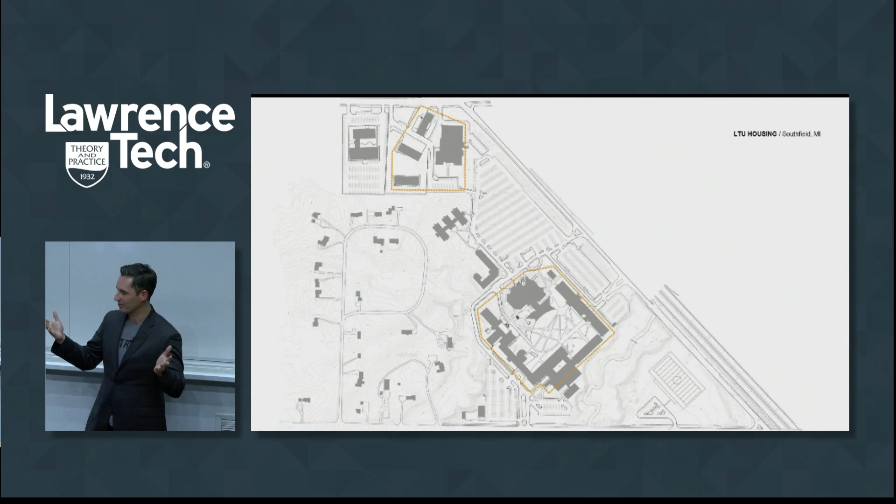And what we find is that people like you have way more opportunity to make an impact on that than, say, people like me. I'm actually that age now, so unfortunate, but it's true. I'll probably refer to a lot of things in this that I'll say, I didn't actually do this.

I don't understand how this works, but here's the interface that helped me understand it.

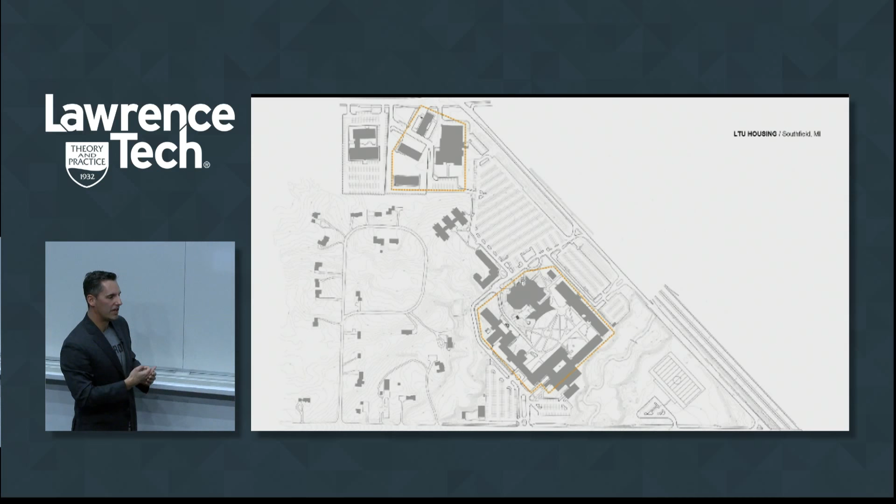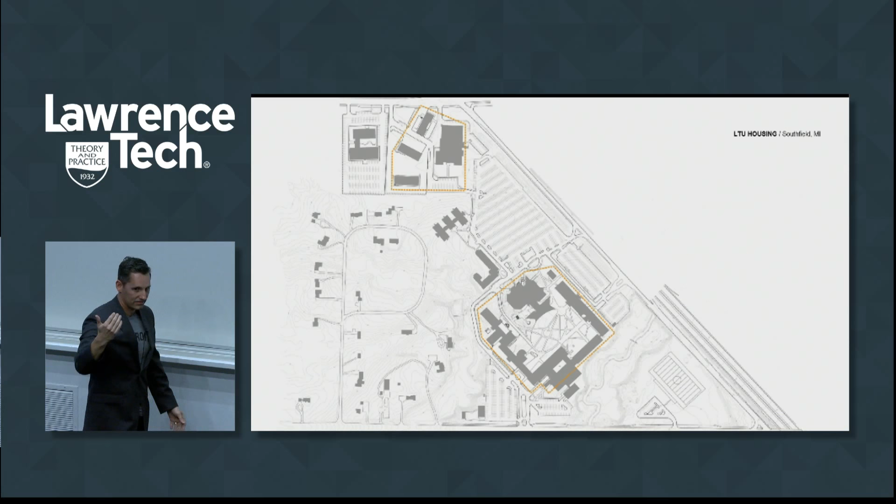So to start with, I did promise we would talk about the housing project. Just to set the context, generally speaking, when you're dealing with design and architecture, there's a three-part triangle to things: cost, time, and complexity or quality of design. Usually those things have a reciprocal relationship. If the quality of design goes up, what probably happens to cost? It goes up. And if the time needs to be compressed, what usually happens to the cost? It goes up. So usually these things have a reciprocal relationship.

Well, the ambition for this was we want to be in it in a year and a half. We need it to be really low budget, and we have a really ambitious design for this. So not exactly working with that triangle, but hey, we love a challenge, and that was a great way to operate - it was an incredible design challenge to work to.

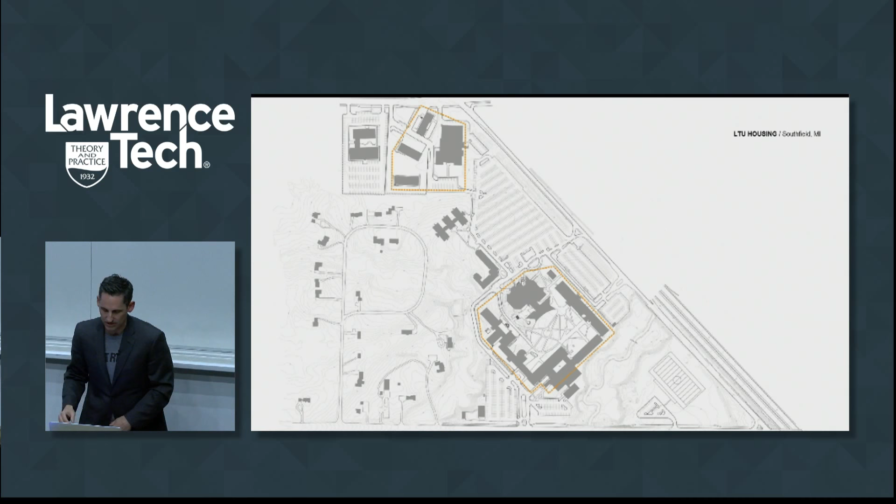So what you're going to see is the process that got us where we essentially are, and then where it sits in construction right now and why.

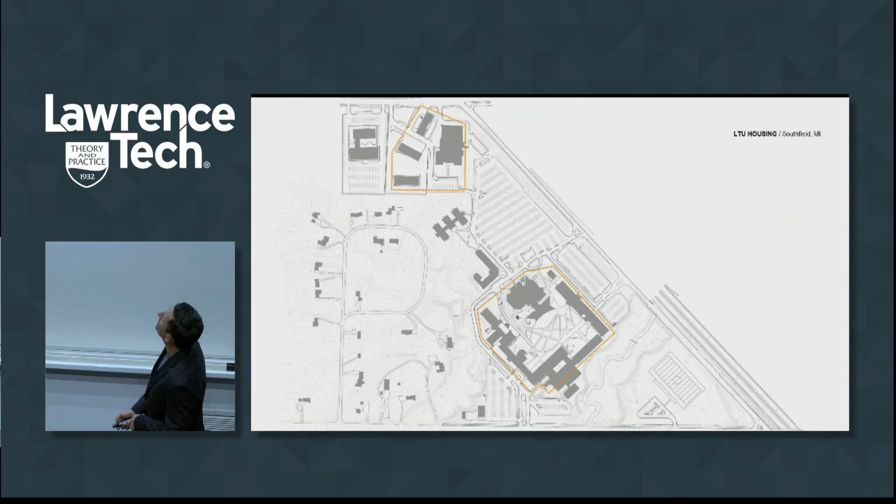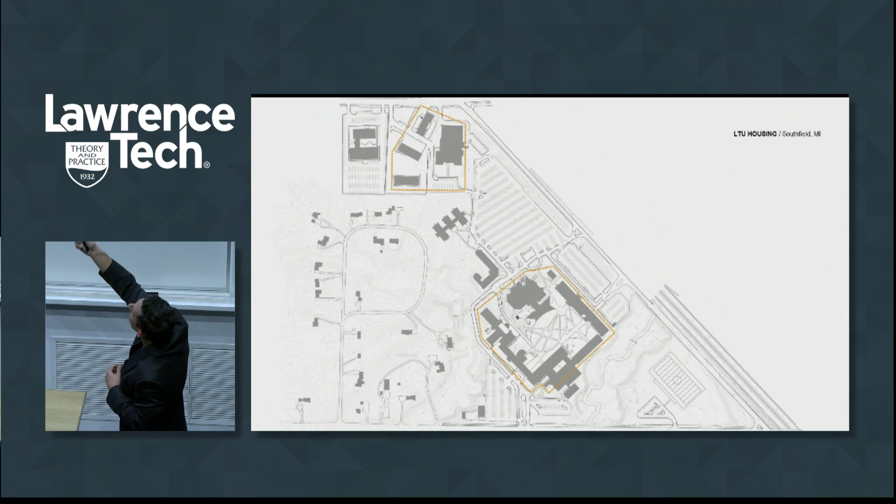To start, we looked at two components of the campus that were important to understand. One was the academic part of the campus. We call the other North Campus or ancillary structures. With each of those, in a figure ground relationship you find there's a nice space created. There's potential for it here. But there's this area in between that we were really interested in - the idea of could you create a district for housing. So it's a housing district, not necessarily just two buildings.

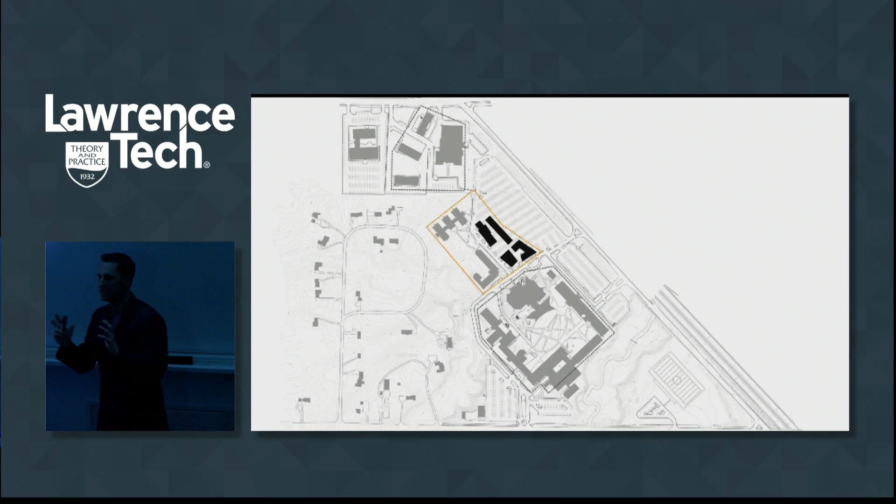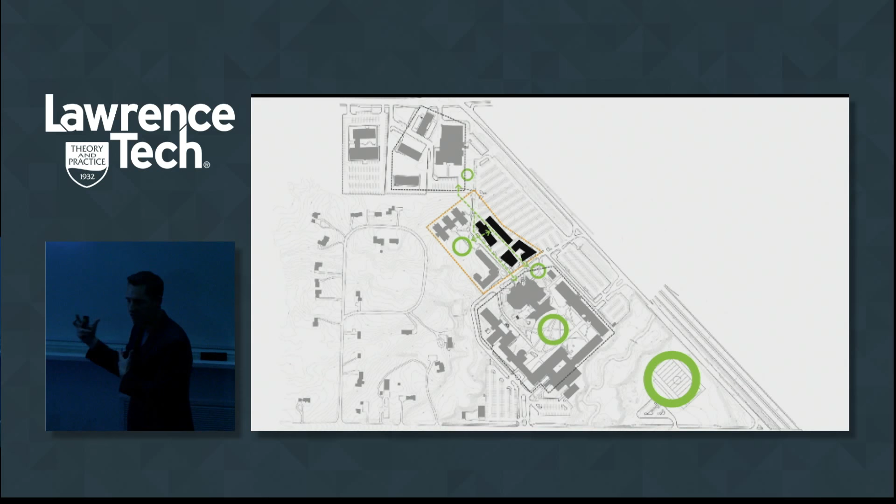So we looked early on at the idea that there could be a collection of buildings that would connect the academic campus to future development of ancillary space to the north. The thought was if we look at this linear relationship, there's strong connectivity from the ancillary part of campus to the academic part, and that could happen through the idea of a housing district - also creating space for a housing district so that by adding a third building and creating that space, there's something shared as a public, campus-accessible space within it.

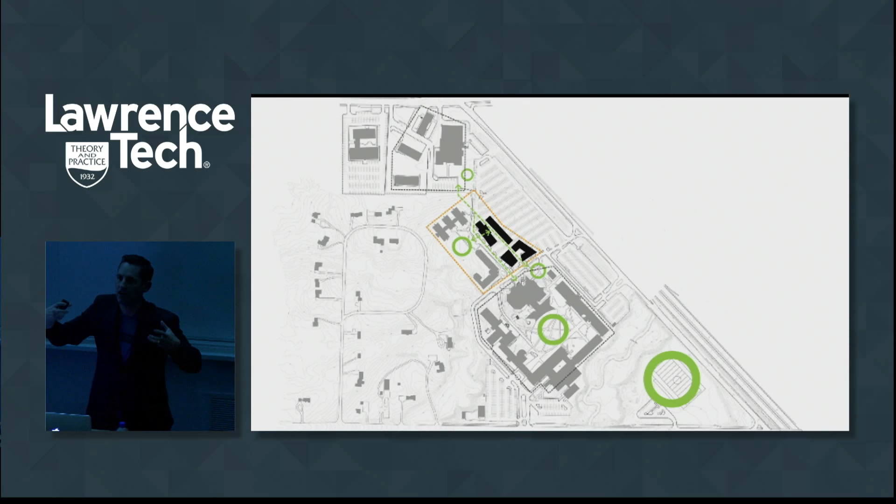So we started looking at locating the building in this area. The idea was that as we project and go vertical, it creates potential for a campus space within it. We also looked at the fact it's within the parking lot, so we elevated it, gave it a bit of a podium, so that if I'm in a residential unit, I don't want to be looking directly out at parking. Give it a little elevation so it has a sense of privacy.

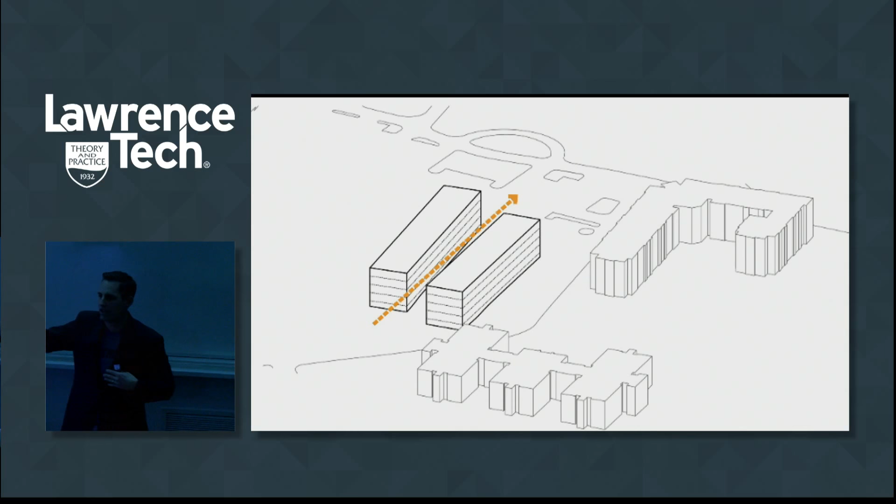And then we looked at the split. You don't want to feel as though it's broken, that you're not able to see or make the connection between the north part of campus and the academic part of campus. So this idea of a pass-through.

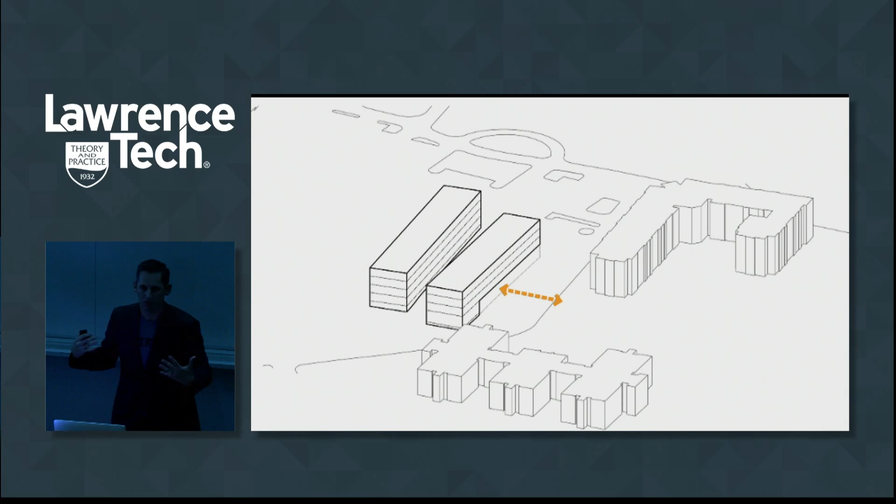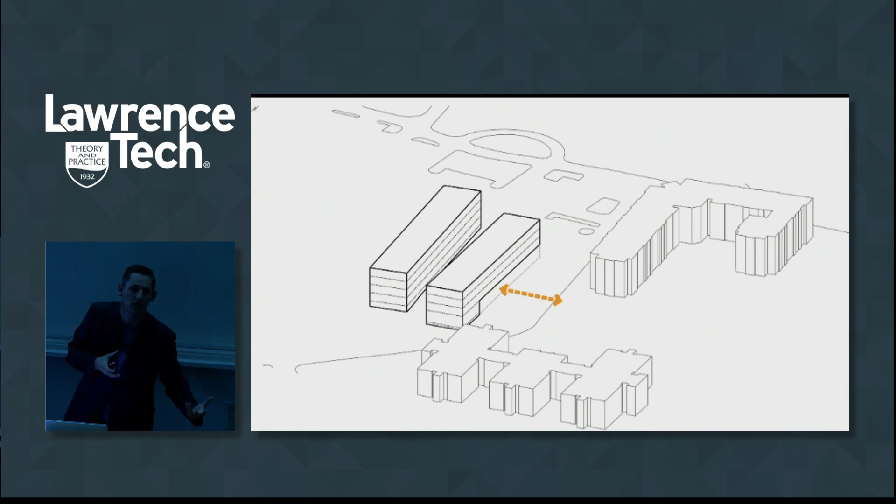The other condition that was really important is there's got to be a public component of this. In other words, if people are passing by or this is a gathering space, how do we treat the first floor so that it's not housing - it really feels like anybody can use this type of space. It's probably not a secret the football team is coming, the marching band is coming, all these kinds of things. Maybe there's not as much access to the fitness facility - what are other programs we could put into this that create a dynamic relationship, a used-by-all scenario?

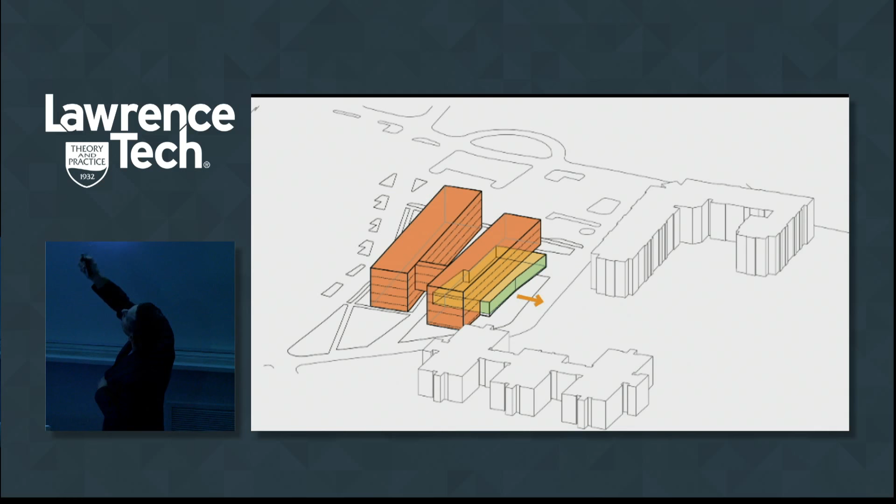That gave us this sense of taking the whole ground floor and accommodating it as public space that can be used for everyone. The housing component comes within modules up above. I'll talk a bit about the modules later - they became very important from a cost-conscious standpoint and really maximizing the efficiency of the housing project.

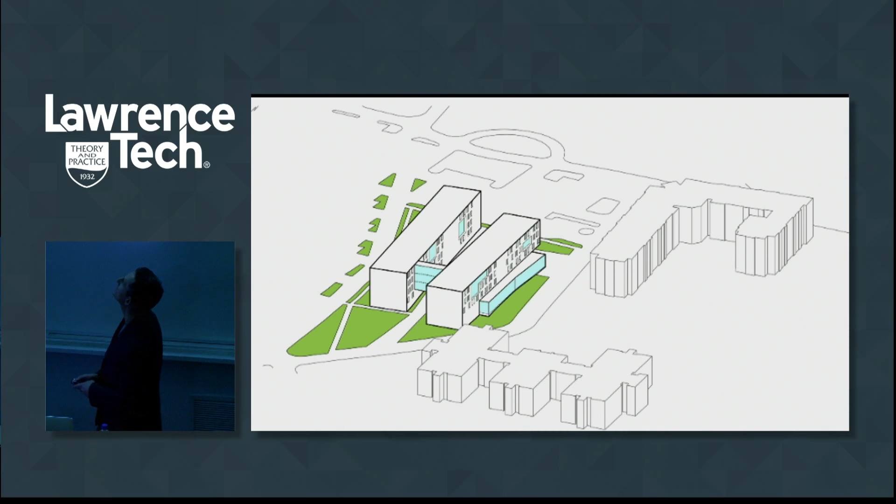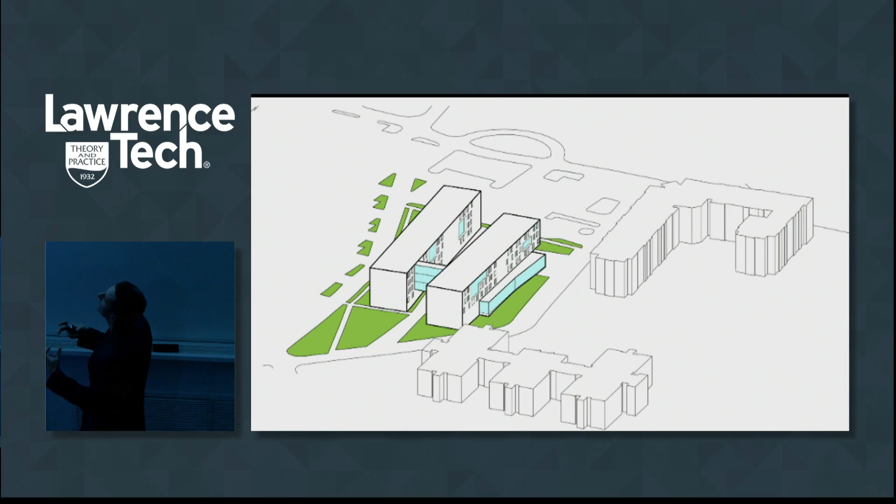From there, what was really critical is, if we're going to have these zones for circulation and moving through, to make it campus-like, that it's not vehicular dominated—really looking at pathways within green space and creating public settings so people could both gather and move through, and then allow the automobile to be more of an urban relationship at the edge, so it feels like on-street parking conditions and gives it a bit more of an urban feel overall.

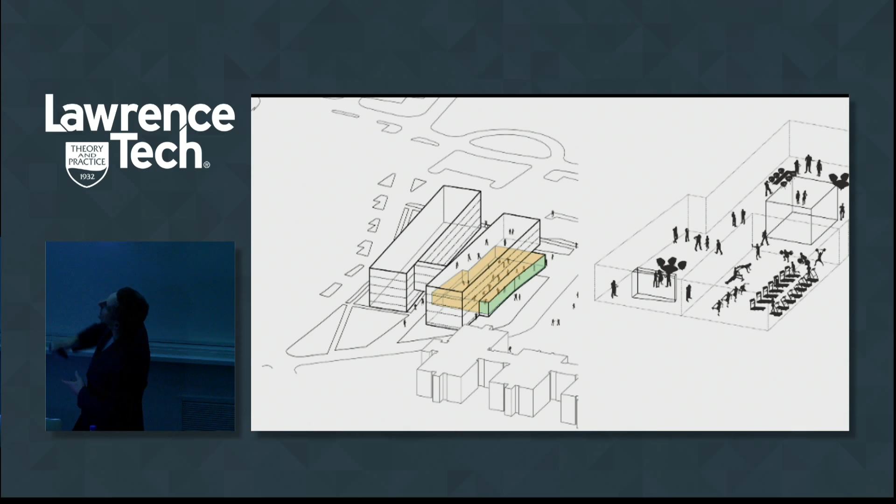We looked early at this idea of other programming on the lower floor, so living room type space, cafe type space, fitness center type space. And then within that, how could we also look at other community spaces, so this wasn't just a dormitory but a pretty sizable housing complex? Where are the places that community exists?

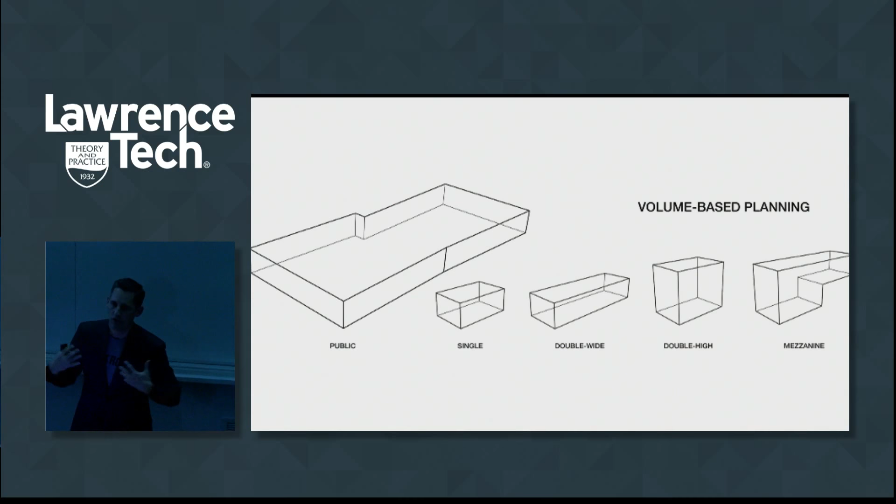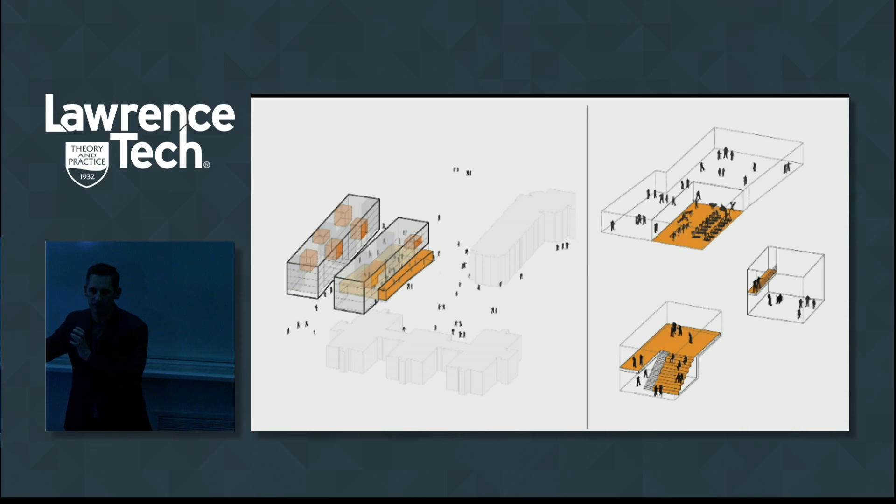So where we started with the idea of the larger public space, we could take bays in those modules and look at single, double high, or mezzanine type spaces to create those within that. So what we looked at is, what's a series of programming we could analyze and give a lot of differentiation to? You may have reading rooms, game rooms—game rooms in such a way that one's more active, like foosball, ping pong, things like that.

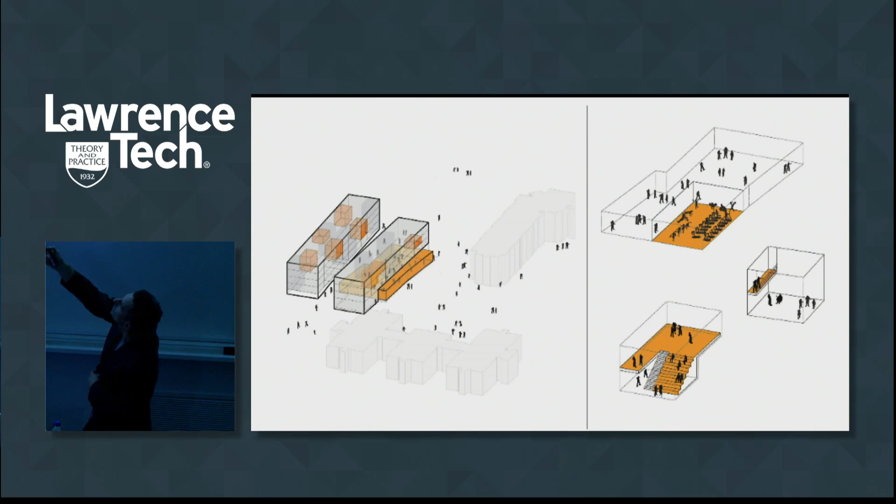One's more passive, cards, things of that nature. There could even be a place for cinema, for showings, for things going on—a dynamic relationship both within the building and externally, and those would be vertically integrated so you can have neighborhoods or groups of spaces happening in between these zones.

And it was always the notion that there's never more than 24 beds collected together—you want to know your neighbors, the people around you. So if you look at this, it's almost a city within a city, but then you have your neighborhoods and districts that become particular to what's there, with the ability to traverse all through the building.

So you may not necessarily just be in this part—if my room is here, I may actually come over to the other bar to access the music room community space. So we also look at that from a horizontal plane.

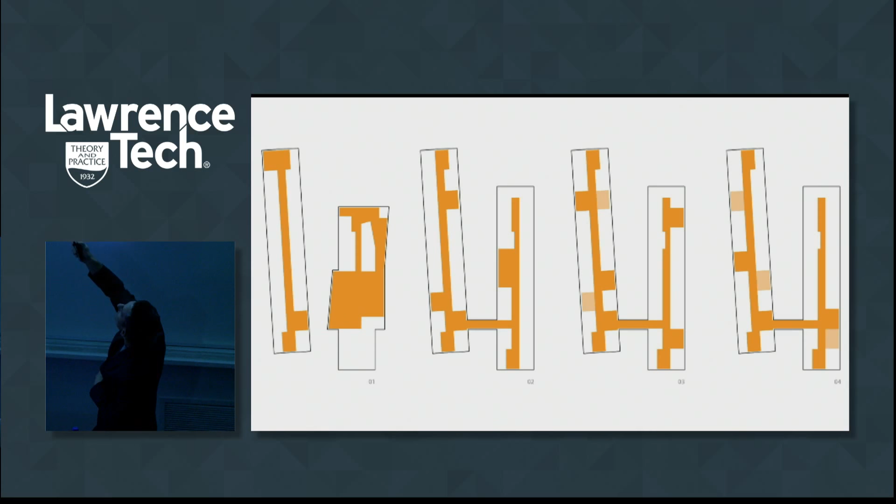Same idea—we have the whole public lower floor, but this is broken up into districts, so there's kind of a grouping and a grouping and a grouping in terms of where the housing may fit into it. And a real critical component early on is, if we're looking to maximize the efficiency of this, what is the module?

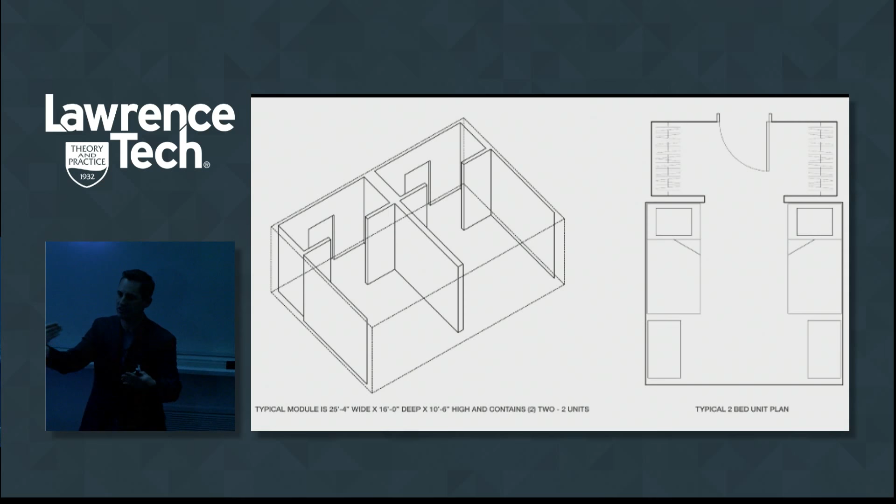So this was a given in a certain sense—here's what's worked in terms of housing, here's the maximum amount of size we want to give. And so we said, okay, we're going to play with the Lego that you gave us, and we're going to figure out how to look at the assembly of this, but let's break down the Lego into exactly what are the proportions and criteria that's there.

So essentially it's 25 feet 4 inches wide, 16 feet deep, and 10.5 feet high, and each module contains 2 units—so you would have unit 1 and 2 within this. And effectively, when we start to look at these units, we get them in such a way that we're looking at them completely three-dimensionally—how does everything fit within that unit? That ends up being the core and the base.

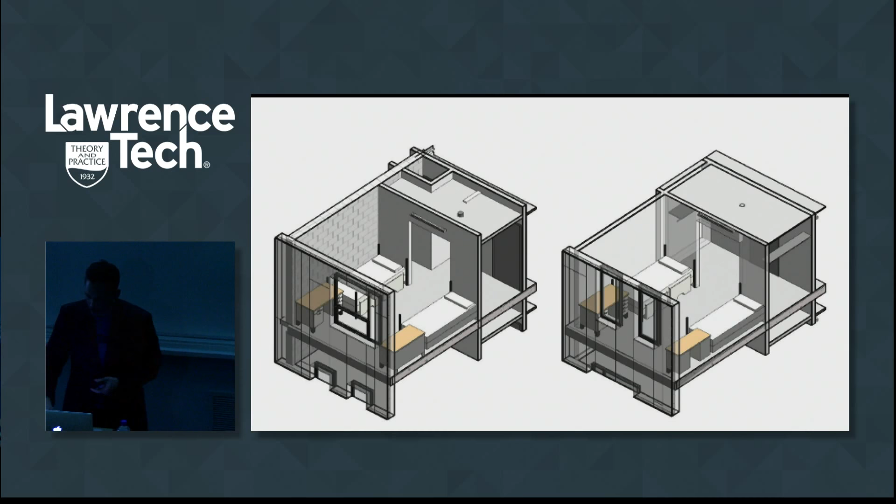So we go back and forth, and I think this comes into what does the future of design start to look like. We had the opportunity to work a bit with a studio doing computational design, to have a conversation about how we use this as a tool in thinking about this.

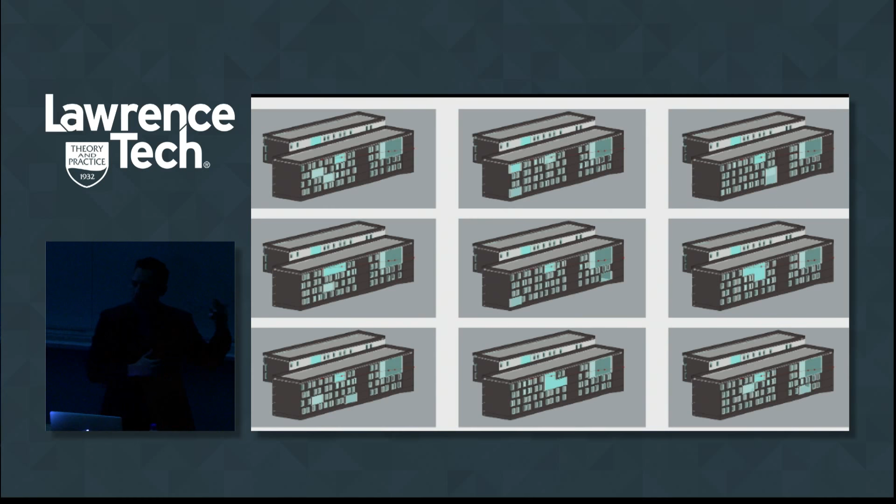So what we looked at is, there has to be a lot of different iterations we'd want to look at, the relationship between, say, these units and these community spaces, and how do those arrangements work—what's the right type of proportioning, where they are, so we have dialogue between, say, second floor, third floor, fourth floor, and the right approximation. And so the sense was that there was essentially—hopefully I can get this to run.

Went really dark. There we go.

There's a series of iterations that have rules. We never move outside of this core or this core for a stair, but everything else is open for interpretation. Working through that, you assess where the best places for these community spaces are. Then within the modules, we have the 25'4" module.

In order to be cost conscious, there are two types of windows: a more square window and a split. It's set up so that the right proportion relates the square windows to two — so you have a single and a double. Within that, you look at a 25'4" ratio.

If you look at all the vertical lines, that was essentially approximated to right-size the metal panels, so there are only three different sizes of metal panels. We build in this rigorous system, and then we can look at the manipulations within it.

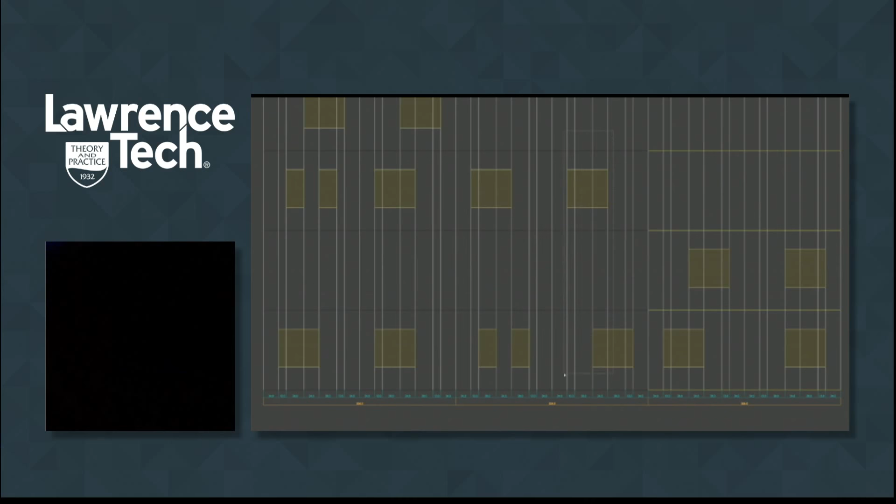So you don't necessarily feel the reading of this hard grid, but everything stays within this very modularized surface. We can apply that across larger areas, and you can see the kind of relationship and exploration we can do to give diversification to the facade.

Applying it from there, we look at the culmination or aggregation of all four facades. One important thing is that the modulation of those windows takes place outside or around where these community spaces are.

This neighborhood can be modulated and moved apart in its direction, and each facade can be controlled in its own environment, subject to one another.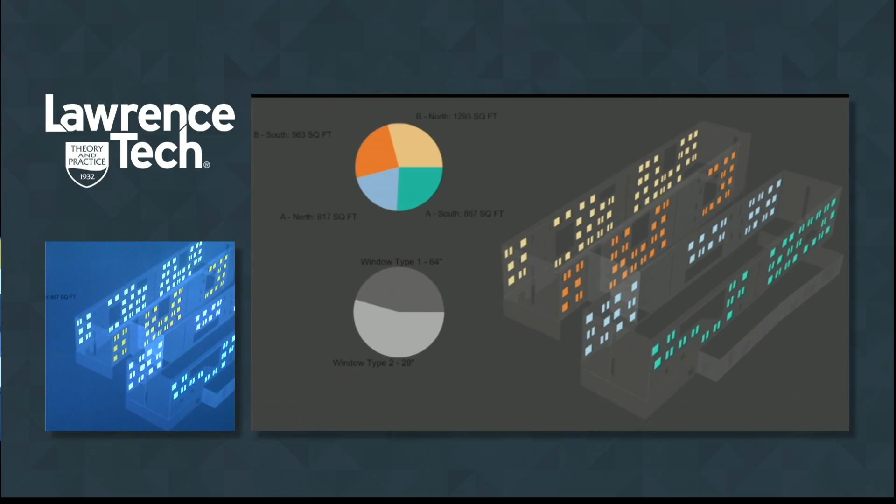The other thing we can do is apply parameters to these. So if we need 60% window type 1, we can move the needle there. Or if a contractor says it's a lot cheaper to use more of one type, we can manipulate whether the percentage goes up or down as we look overall.

We can also look at the amount of glazing on each facade and the percentage for daylighting. So there's a lot of modulation, giving you a number of repetitive iterations, which puts you more in the position of analyzing things rather than specifically designing one iteration after another.

What it allows the computer to do as a tool is give you multiple things to evaluate, as opposed to just your priority or idea ahead of time. More importantly, the strength is that we can put certain performance parameters into it that we can then measure to see how effectively it actually works and performs.

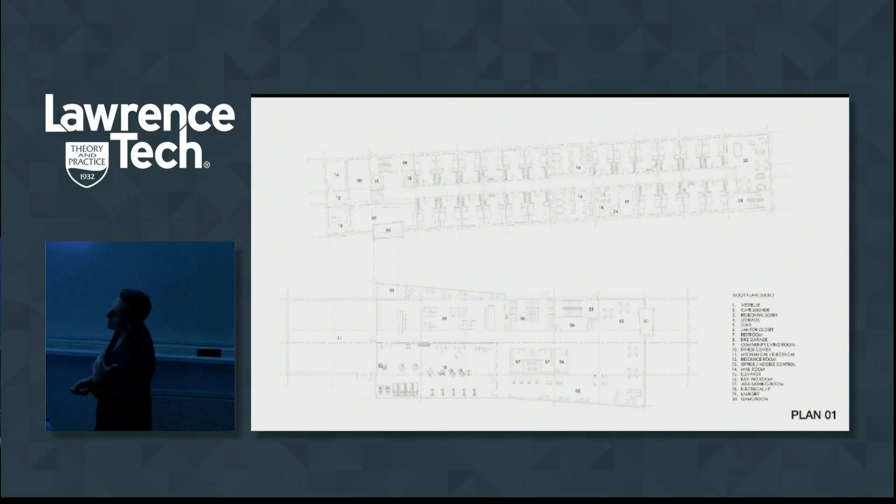We'll talk a little more about that, both in terms of cost and performance, as it relates to some other projects. Just quickly through the plan to give you a sense of the lay of the land — this is north in this direction.

The academic campus is in this direction, with the main entrance on this ground floor, which has the fitness center and public space. This is, in a sense, the residential space with kitchen and living-type spaces, then an entry off the courtyard space here that also goes into the dormitory.

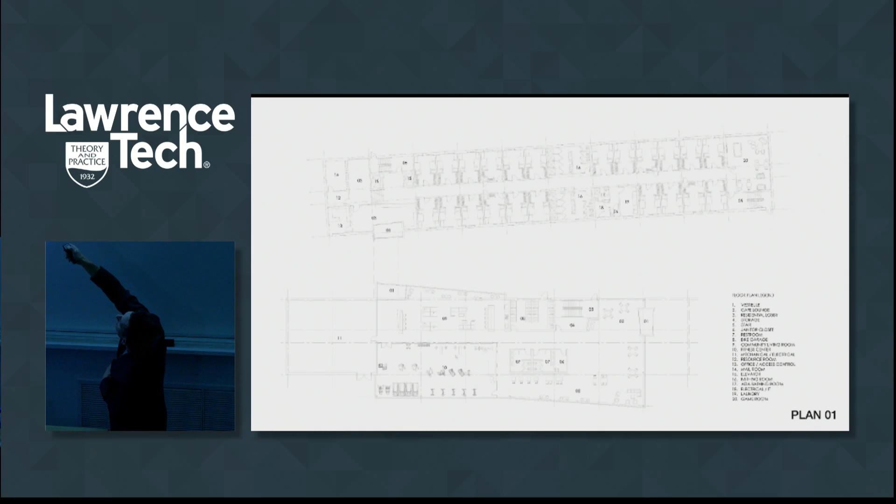Again, this is all at grade, but there's a small topographical change here where, as you get into the housing, it steps up.

The other important thing as we move up is looking at the community spaces as they sit within this — there's a lot of diversity in the types of spaces: music and individual practice rooms, collective spaces, different game rooms, and reading and social spaces.

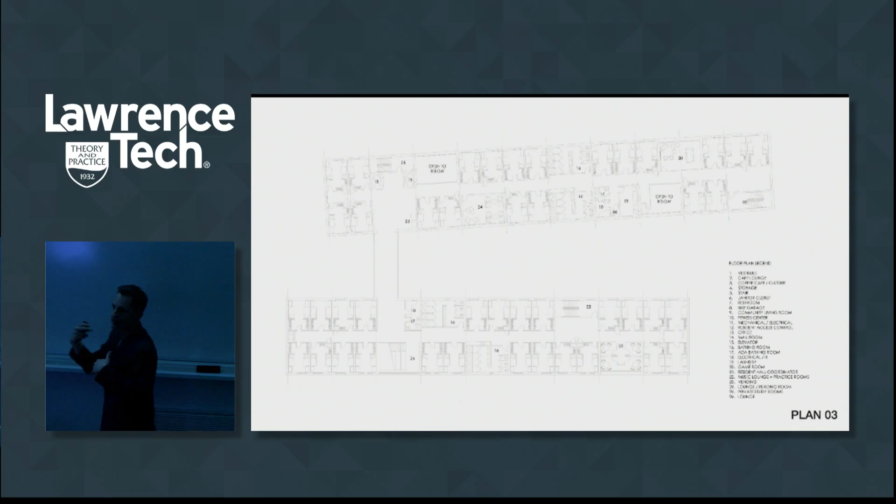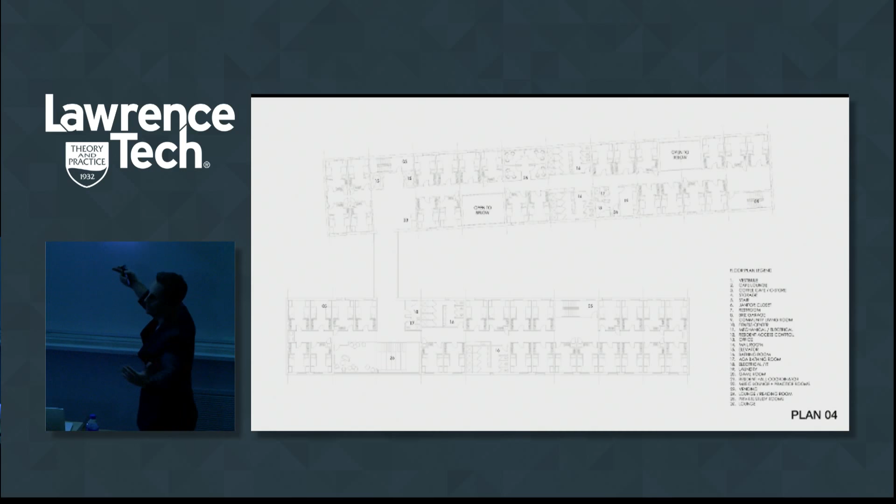There's always the idea that as you move up, there's an open-to-below so that the second floor connects to the third to the fourth, and this becomes a critical piece spanning over to a mezzanine-type space that gives the terrace seating the ability to host films, lectures, or any social events, as well as just a seating area to hang out.

We're really looking at giving a bit of grandeur to the entry so that it feels very public. The idea is that it would be all glass, opening up into the courtyard or green space between all three housing areas.

And then really denoting this idea of entry with these kind of yellow boxes. The other thing you might see is we've treated the exterior envelope with a little bit more cost-effective type of material, but it has this idea of enclosure. As it comes into the interior, it's more private, intimate, tactile. The material quality is raised a bit, giving you a sense of intimacy as you're within the interior.

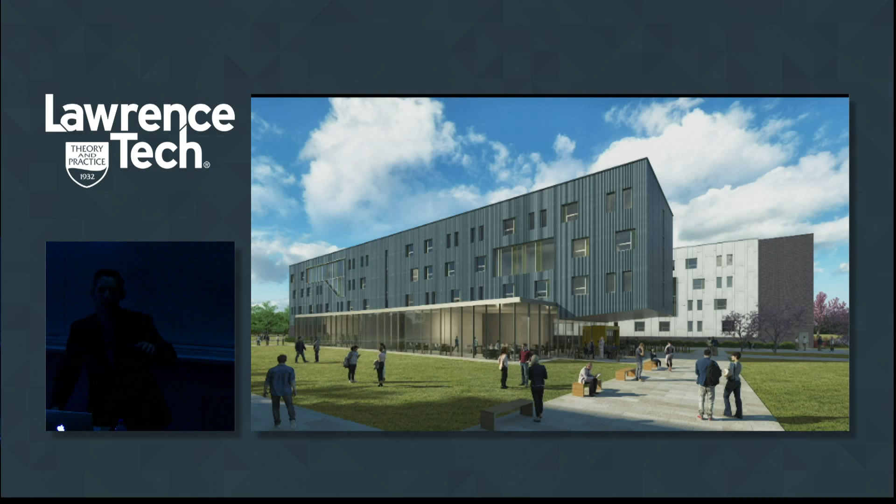The cantilever—we'll talk a little about this—we were looking at structural systems and what's the most efficient way to do it. So you get the good and the bad. We show you the struggles and the things we went through as we evaluated this project.

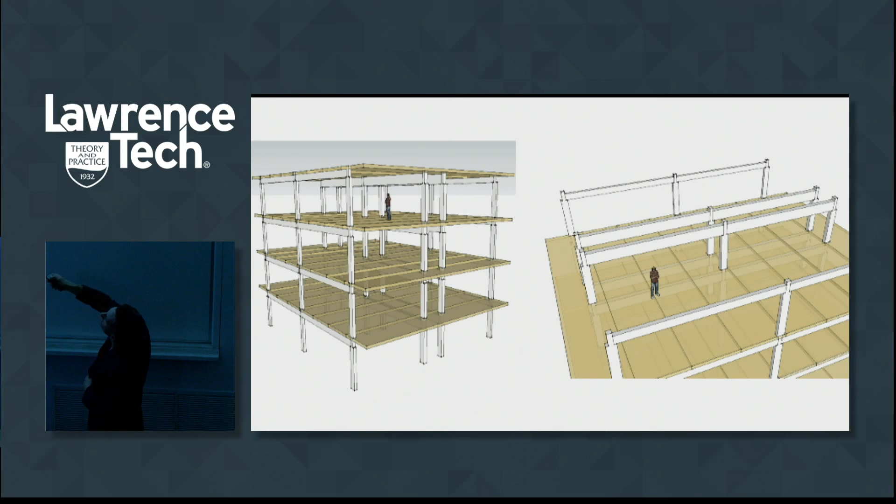When we first looked at this, we wanted to look at glulam timbers and CLT. Essentially it would be all wood framed all the way through, with exposure of wood within it. An interesting aspect is that it would end up being columns and beams, allowing the planks to run in this direction, which means we're free as we go from space to space. We can move and we're not locked into something.

One interesting thing is we tried to very competitively work structural systems in, and the timber was becoming competitive. But there are so many outside parameters that affect this. What was fascinating is that as we got closer and it looked like we might be able to deal with the premium, it was actually the insurance on delivering and erecting the CLTs that made it not cost effective at all. So sometimes it's beyond the parameters of what you'd even think, just because of the lack of familiarity.

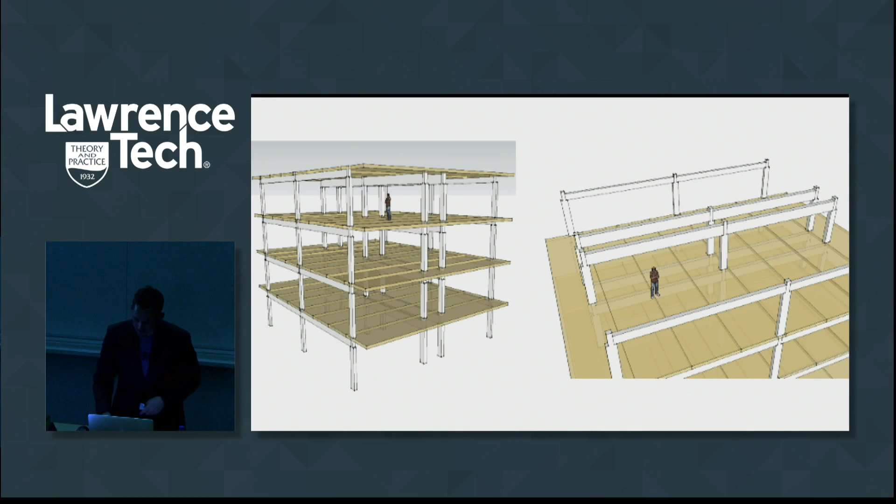I think it's one of those things we want people to understand—the impact of how you have to make decisions, and where the cost implications come from isn't always clear, even if you call a vendor or anybody else.

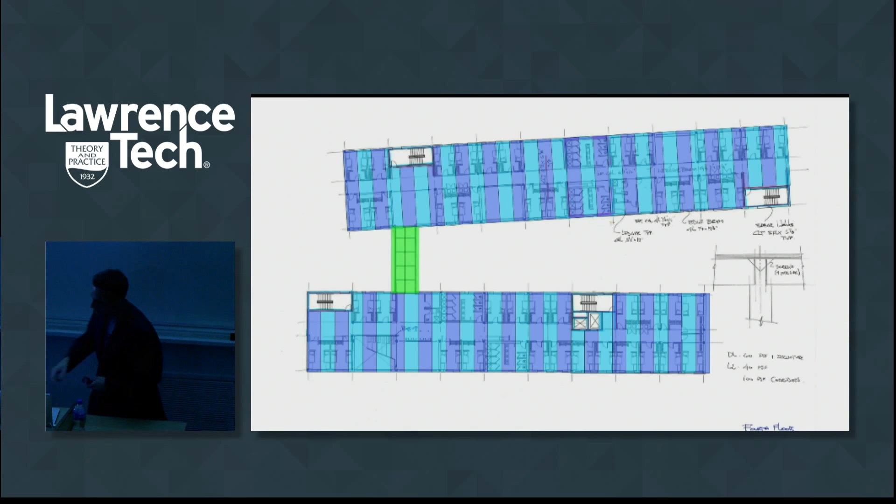Again, the idea is it spans essentially north-south, or east-west within each one of these walls. But then where did we have to go? The most cost-effective solution we ran into was the idea of block bearing walls with concrete plank—you see this a lot in different housing types. But this had to be a hybrid situation because that ground floor couldn't bear having all the masonry walls in a regular pattern.

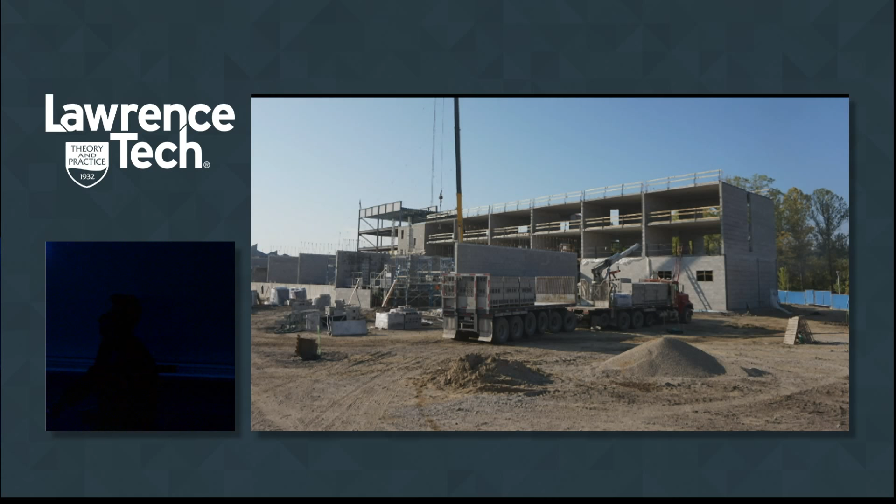As we look at the erection process, you can't see it very well, but essentially from this point forward is all steel, and you can see the steel move up within this area. The reason is because of the cantilever you see on the end. So the structural steel moves up, and it was actually an intelligent idea by our structural engineer to look at plate girders on the roof, so we didn't have so much spanning and girder trusses within the fabric of the actual spaces being utilized—so it didn't inhibit door openings and things like that as much as we'd generally see.

And additionally, you can see here the modules that are broken up, and the idea is that there are two sets of rooms within each module.

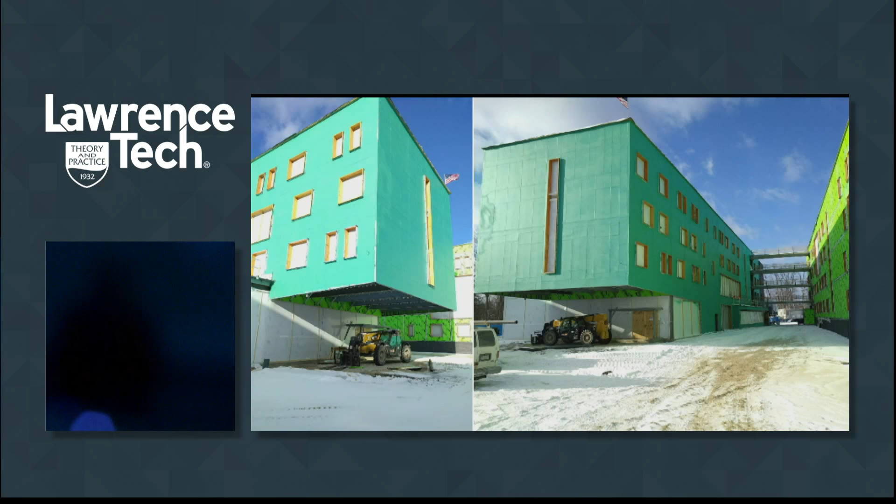As it's starting to be clad, the girder trusses just disappear behind it, but it gives us the ability to have all of this being open—particularly so you have the ability to see into open public space, and it's very accessible in such a way that you can have program space on the exterior. So you have a strong relationship between interior space that's used and exterior space that's used.

And then also that kind of transition as you go more towards the courtyard, giving you a very different read and feel. The idea was that it's not just a conduit to get from one part of the campus to another, but also a place to sit and be peaceful and more serene.

And it was interesting because we were having a conversation earlier about what's the right kind of proportion or scale of this.

As it's been erected, we think it's come together very well in terms of a very intimate courtyard, but also having an interesting relationship between the public spaces that are looking back onto that. It adds a kind of dynamic to it.

Looking at the relationship of the very public space, the music room within this zone, but also treating service-wise things like laundry so that vertically, all of these service elements are collected together.

The laundry is, in a sense, predominant, and we're providing natural light into the laundry rooms. This gives a sense of the interior of one of these spaces, where rooms spill out to a common space that's open effectively to the floor below.

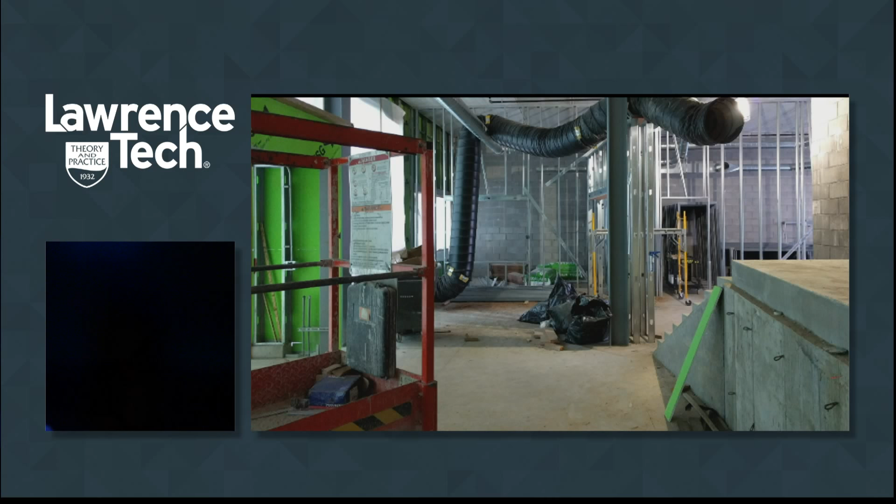As cars are coming by or people are looking back, you can see when there's a lot of activity happening within that zone. At the same time, there's a little elevation deviation that affects the entry, where you come in at grade with a small stair, and you sort of stare up to have that elevation change.

You think of it a lot like the way row houses work. You step up and can see the activity that's there, but you have that private zone that you actually live and reside within.

You sort of read the base of where that exists: a very public active game space within this zone, a more passive game space connecting the third and fourth floor, study-type carrels on the fourth floor, and a more private, quiet reading space connecting both the second and third floor.

So very diverse types of spaces exist within it. Collectively, it gives a very strong reading to 10 Mile, Southfield, and the service drive, so people get a real feel of the activity happening within the residence.

While still leaving the individual rooms as very private, because you're not seeing it at the scale of the individual housing rooms. You start to see from a distance the larger scalar components of the community rooms.

The largest community room speaks to that public space created on the west side, and the dynamic of—you can't tell now because it's Visqueen and not glass—but how it would connect to that public space.

As you're walking along, you're seeing the activity that's there: coffee bar, fitness center, kind of all the activity that's really within that zone.

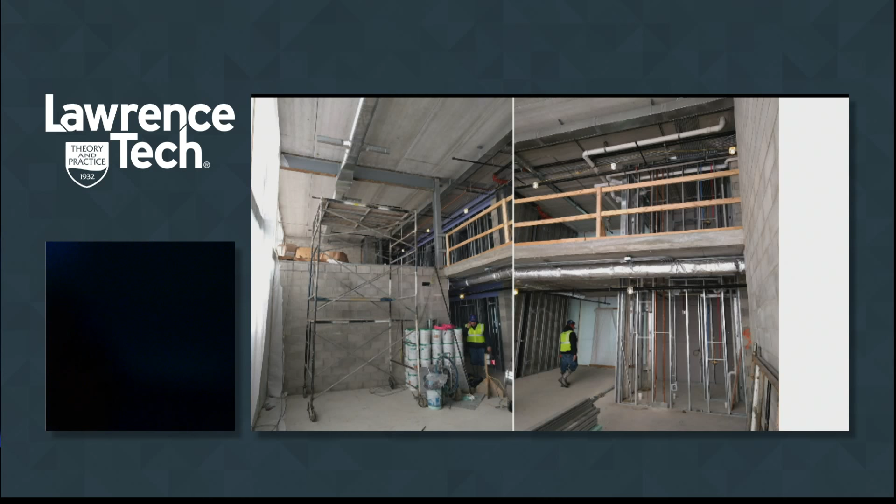That gives a summary of the housing, but we wanted to move a little bit to share this idea of computational design, particularly as it relates to digital fabrication.

If you're familiar with this, this is the Illy Coffee Bar in the McNamara Terminal, and this was our first foray into really conceiving the idea of digital fabrication. I show this to give you our starting point.

This whole thing was built within a factory, disassembled, and then brought back on site and reassembled. So what are the advantages of something like this? Many, but in particular, you're building in a very controlled environment—I'm not bringing raw material out to a site and working within the elements.

I have the ability of manufacturing tools that are there, clean rooms, comfort of people who are working there, eyes on everybody who's doing things in a controlled environment, as well as cost control within those. I'm not subject to the elements and all of the things that are there, and an incredible level of accuracy within that. You're also able to work in a way that's fast, and so some of the obstacles that come in then is kind of delivery to this.

How are you dealing with the assembly phase of it? So we really look at it as there's a certain level of fabrication, and then the assembly goes in.

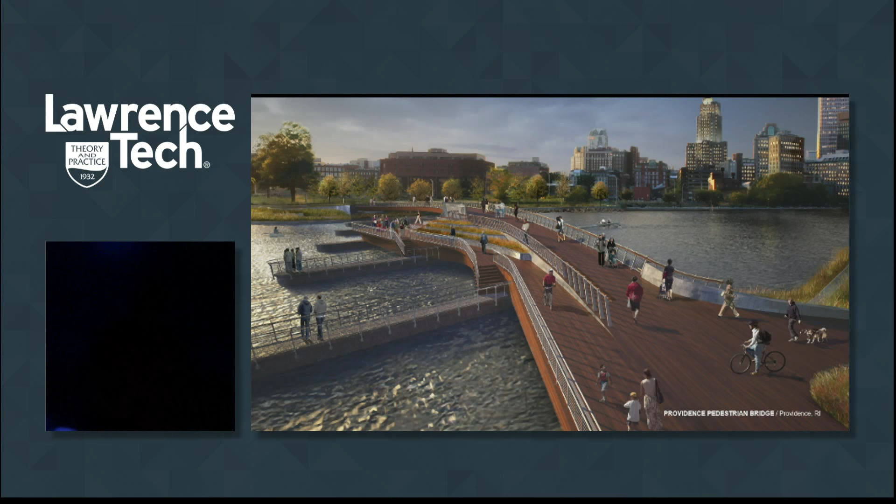What was exciting for us is to be able to scale this up, and this was scaling this up a lot. This is the Providence Pedestrian Bridge in Providence, Rhode Island. This was actually a competition that we won in 2010, and sometimes, when time really compresses you, this gave us a lot of time to add things in as we go in terms of technology, thought process, how we would build.

So initially, when we looked at this scheme, I'm not going to talk so much about the design of this, but just to give you a sense, there was a lot of directionality with this. So there's the east side of the river here, west side of the river here, Brown University is over here, Fox Point neighborhood is here, they have the Riverwalk within this area they're calling the Knowledge District that they want to expand to, a proposed boulevard known as Dorrance, and then the Riverwalk here. So you get a sense of all of the directionality that this thing wants to move, right?

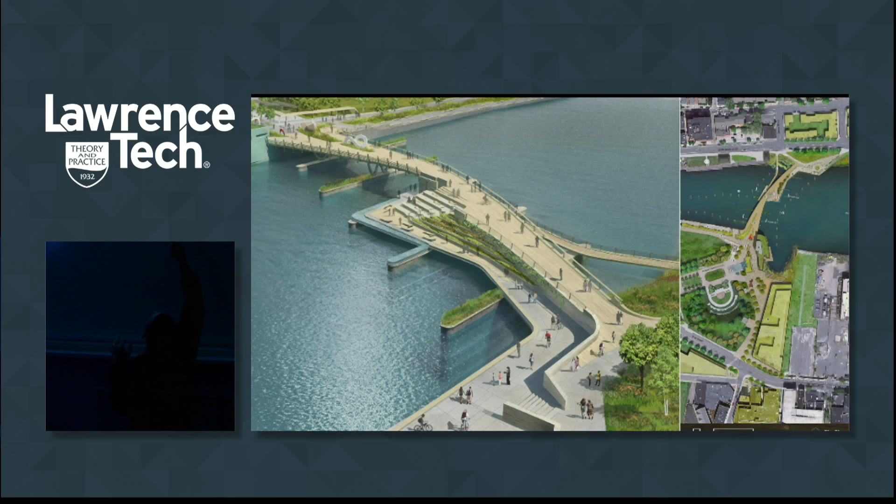And they also had this kind of heritage of shipbuilding and making and jewelry. And so there was a lot of sinuous relationships that were built into the overall form of this, and then really working with the idea of wood.

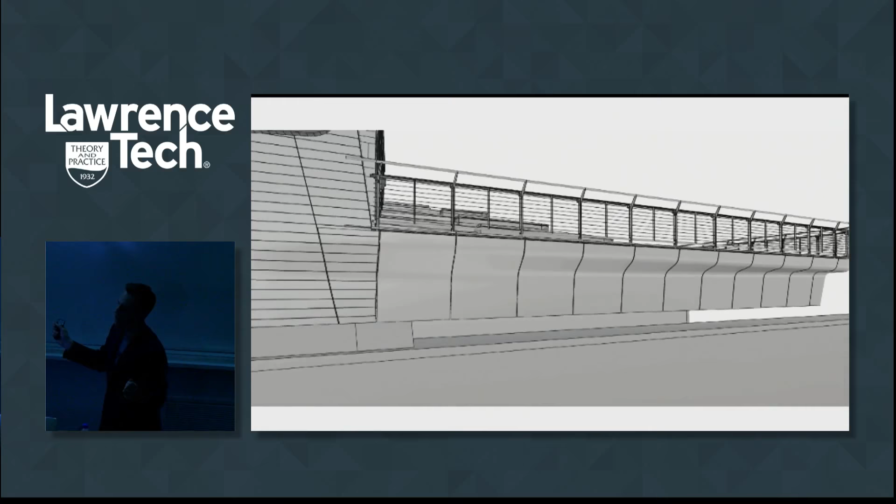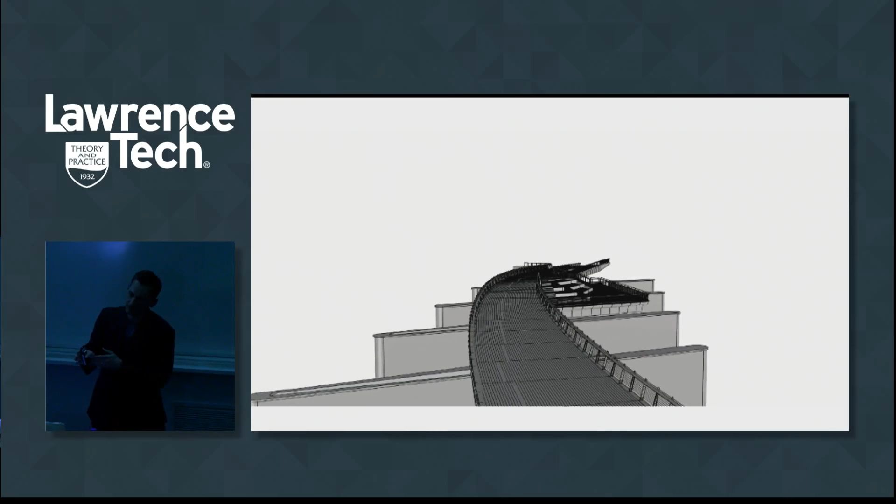So what this is illustrating effectively is the overall model. This is done in Rhino. And you get a sense of the sinuous nature of things, some of the complexities of double curved geometries, so that it has a very consistent movement as you go from one place to another, and it allows you to deviate directionality and yet still maintain a holistic integrity, right? It never fractures, it never creases or folds. It's always a very sinuous movement and bend.

And so the idea behind looking at this was, how do we even construct something like this over the river? What are going to be the challenges in doing this? And so what we came up with is the idea of taking a process of digital fabrication and working with essentially a subcontractor.

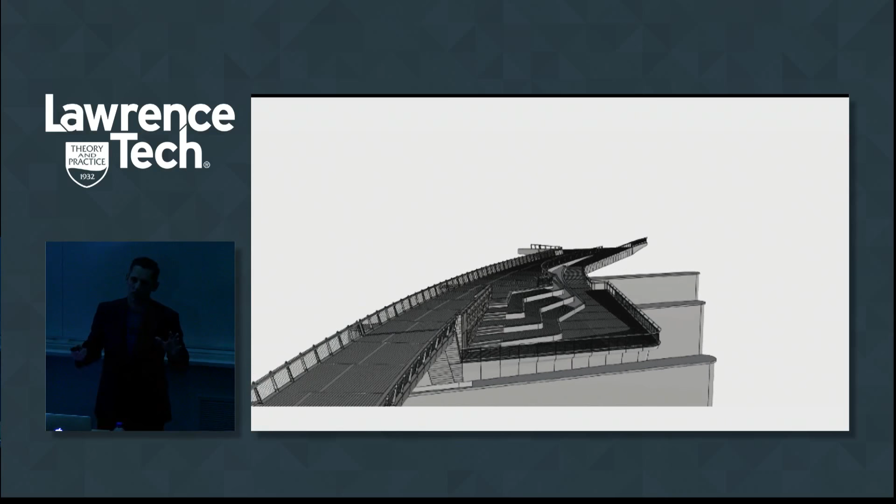The person who got the job is out of Brooklyn in the Navy Yards. And what we were able to do is work with them in such a way that we would give them the Rhino model of what you're seeing in the wood effectively here as the deliverable. We wouldn't draw all of the drawings that were there for constructability.

In thinking through that, there's really two models that were put together for this. And I really want to make the comparison between what worked well and what is difficult and what didn't, because it was surprising, shocking even, at a certain level.

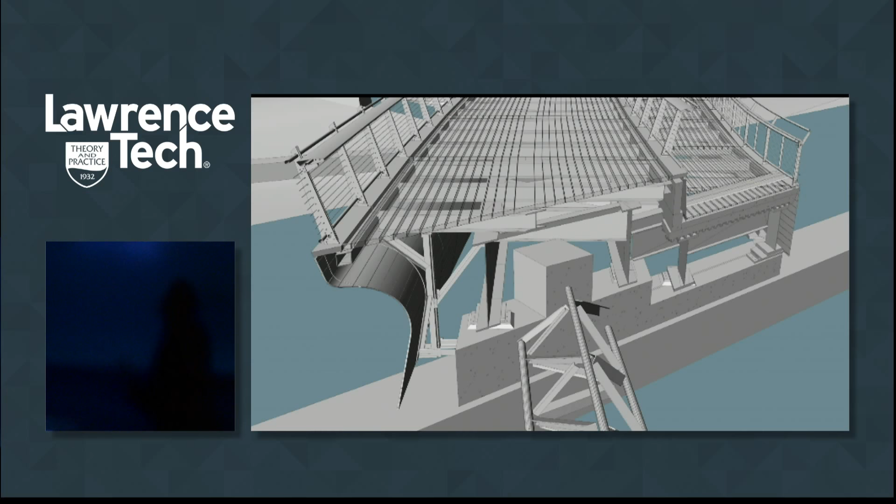So essentially the primary structure, and you saw sort of two zones. There's kind of the clear span, and then the other part that looks like it has the hull or the deck that comes closer to the water. So within the area where the hull comes closer to the water, there's two systems. One is a Revit model, which is essentially all of the primary steel that's within it. And the other is the Rhino model, which is essentially the skin or the wrapper that comes around it.

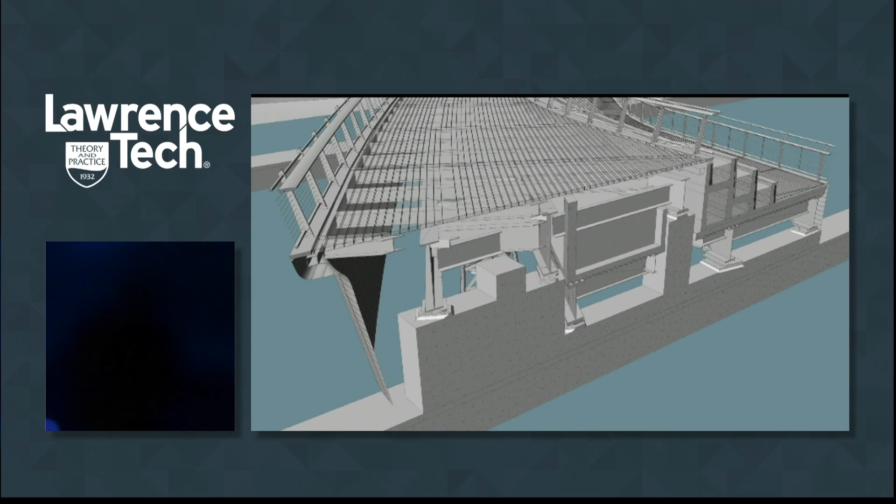And so as we look at this, you can see the deviation between the amount of structure that's happening within the Revit model. That was all done in terms of conventional construction documents, drawings that were sent out, steel detailer sends back drawings, get approval. I can't tell you how painful that process was. The amount of inaccuracies, this doesn't match, that doesn't match. I mean, it was a lot of Excedrin, predominantly for Corey. I feel bad for the man. Just, an incredibly painful process to go through.

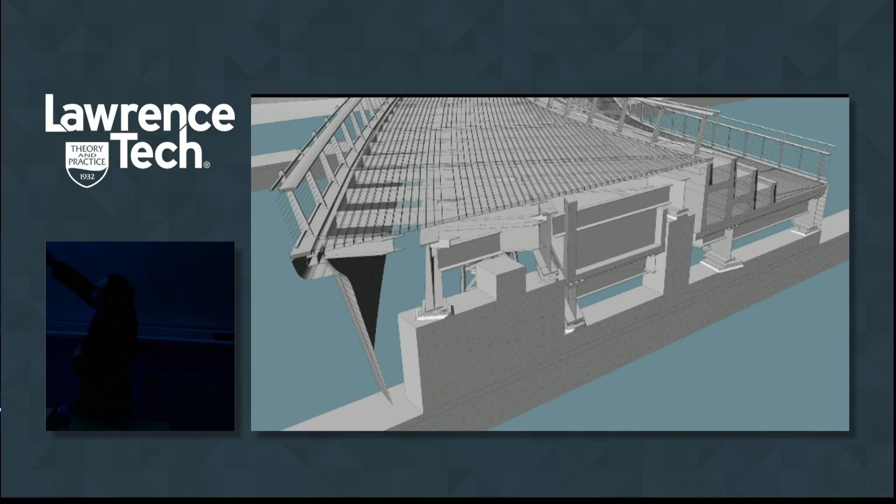We were almost nervous about, wow, what is this going to mean for the skin, right? And now we're kind of advancing into new territory. And so you see the different layering that goes into this, particularly as it goes back for the busker terrace and other components of it.

So what's interesting is that they're still making them in sections. This ends up being the more conventional construction side of things, where they're taking them in bays and essentially supporting them from pier to pier. You see the kind of movement that's happening there.

Interestingly, the south side has a much more tapered, thin edge to it, while the north side is quite different, with a thicker edge, and then all of the manipulations happen in between.

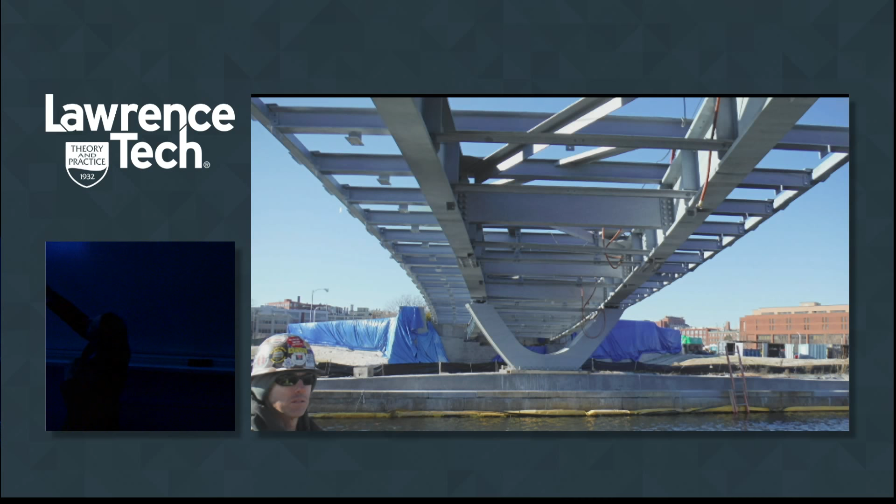This is definitely indicative of Brian's disposition through the entire project, even so much, I don't know why he's wearing a hat that says Kevin, but young guy, super bright.

This is a Department of Transportation project, for Rhode Island Department of Transportation. So what we're trying to do is accommodate this very unique kind of process in something where they generally just build highways. This was a very different process to go through. The conventional method of things, although challenging, was the way that they do things.

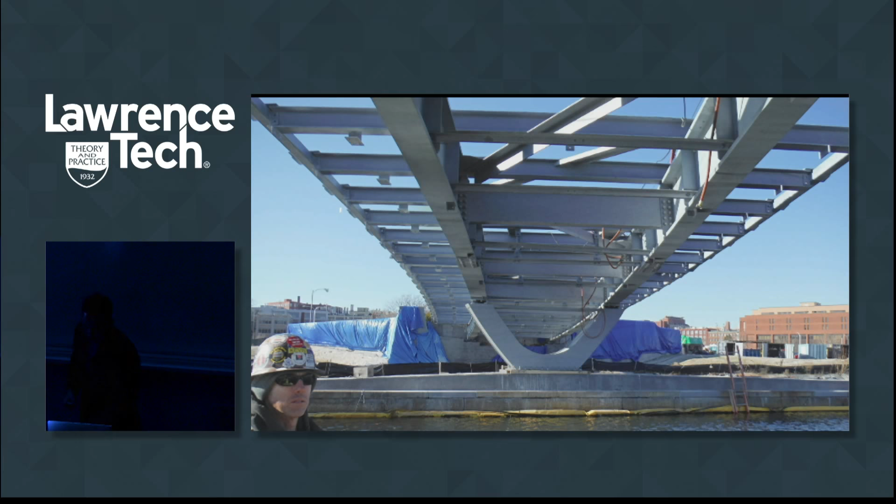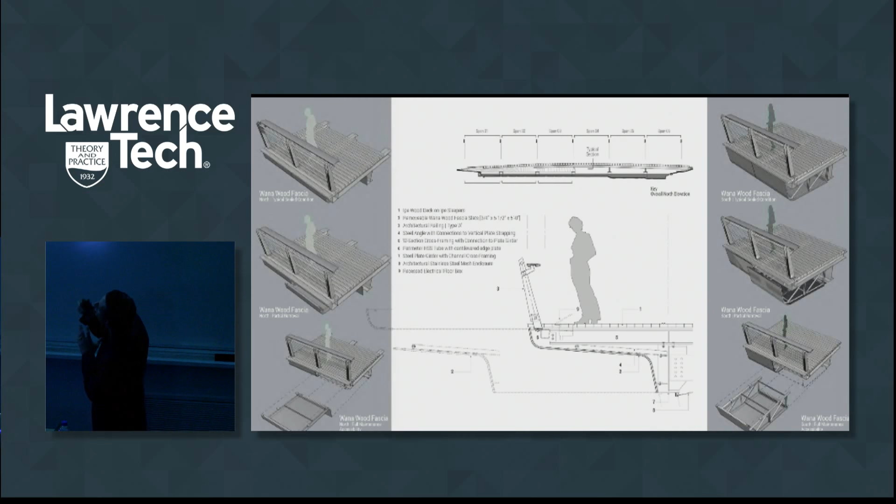As we start to think about this, essentially each of these slide onto the bridge. You can see the thin area on the south side, and then this would be the thicker area on the north side. A lot of transition happens as you get closer to the hull.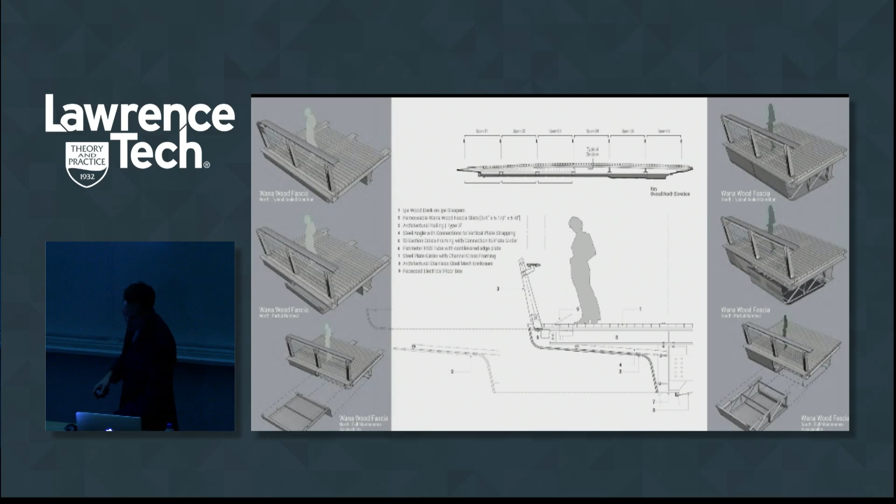So the idea was, okay, let's prototype or mock up a little bit of what this would be. It was essentially developed as a series of slats in this 5-foot section. Shout out to the Make Lab here - Zuby actually came in and had these routed out of foam so that he could make effectively a prototype and bring it back to our office.

You can see the early prototypes of what they're doing in the manufacturing process. Effectively what we're really concerned about is this area, that line, that kind of skin, and they take care of everything back from there.

So what it allows us to do is be very free with however you want to work through the fabrication detailing of this, you'd have secondary or tertiary structure attached back to the primary structure, but we can effectively be within 1/16 of an inch over 300 feet tolerance for where that wood is and its relationship from one piece to another.

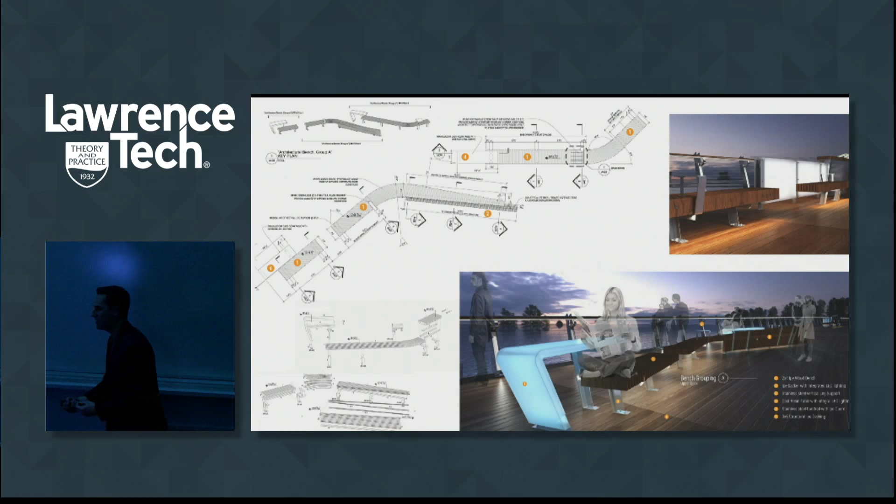That also parallels the idea of furnishings and things like that. You can see it went back to more conventional detailing - every little piece, every measurement, here's all the assembly, those types of things. So you have all three of these things paralleling themselves in terms of fabrication.

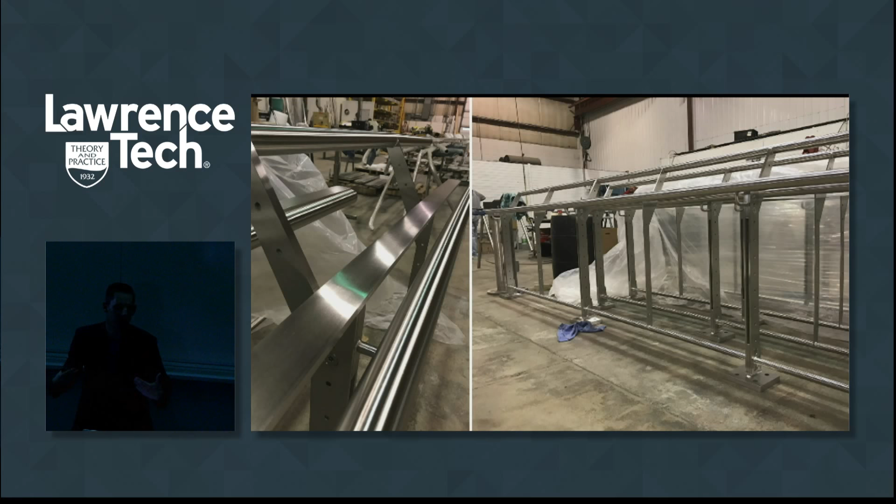That primary steel is being installed still now. The wood is going through its initial periods of fabrication, and the steel is essentially being fabricated all at the same time. But because we can rely on and count on the tolerance measures, they can all be built simultaneously and then installed because they'll be so tightly aligned with one another in the end. So it's really been a fascinating process.

I think as we started to look at the wood skin, it was kind of like we gave it to them and they were like, it's good. Comparatively to dealing with the steel and the countless number of change orders and things, in terms of working through that whole process from a conventional point of view.

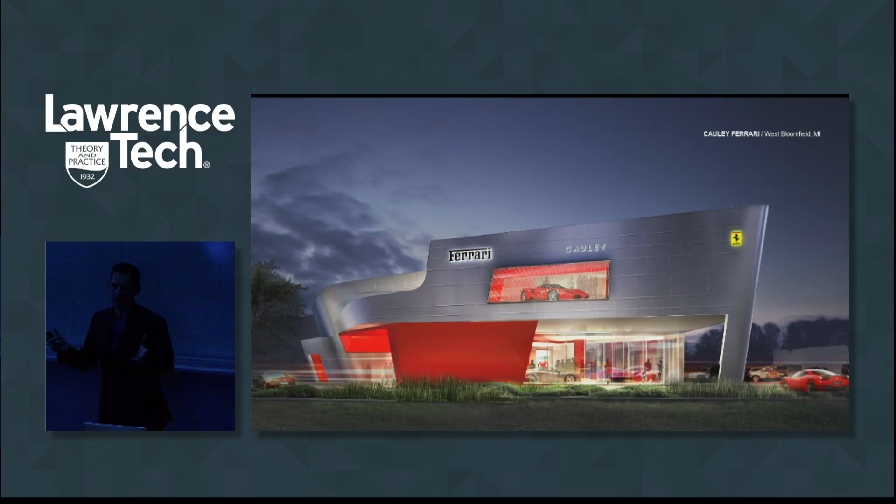This is a Ferrari dealership. Actually, you can kind of see this - it's right up Orchard Lake Road in West Bloomfield. We won't really go into the design of this so much as what it means in terms of taking this idea of digital fabrication again.

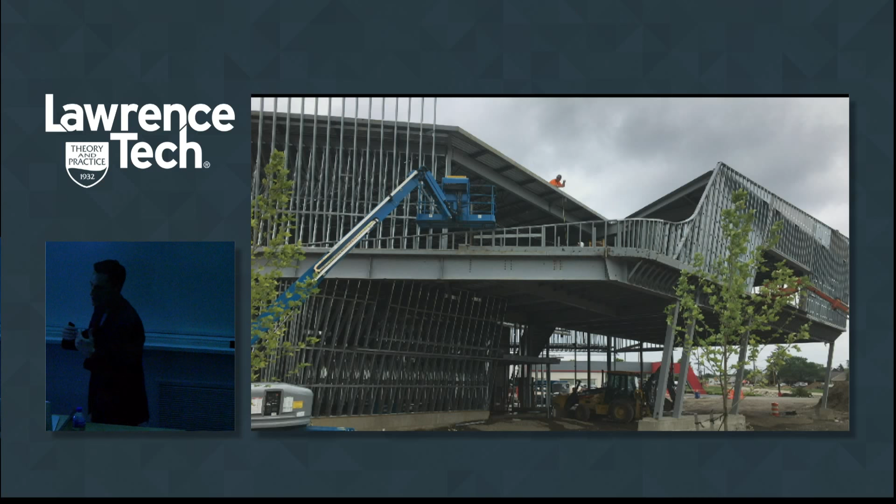Again, working with conventional construction, typical construction drawings - here's metal studs. They're building the shape of the thing overall. It comes out, looks more or less like what was in the drawings. Then the metal panel manufacturer comes out and says this doesn't exactly match up to the skin that you had, and there's a lot of deviations, and the alignments just aren't there.

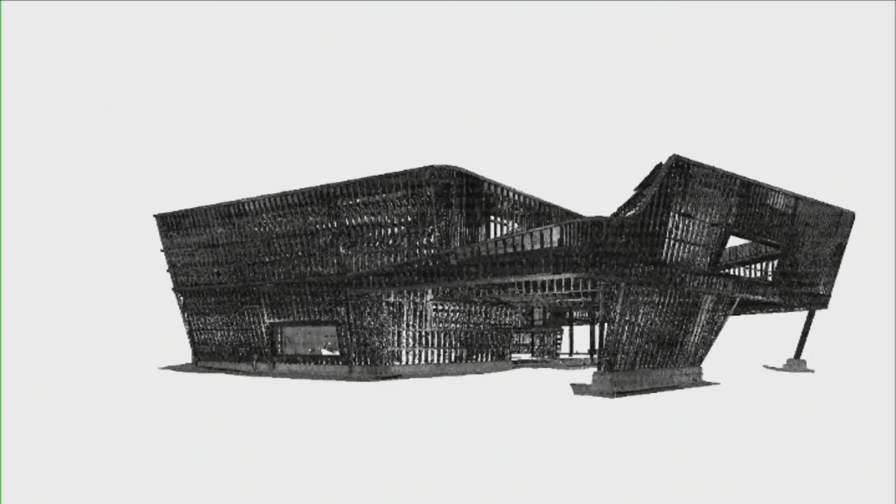From a technology point, what we found really fascinating is that they were able to come back and take point cloud measurements. They put lasers in certain areas and collect data, effectively making a point cloud to say, from existing conditions, here's a three-dimensional model of exactly what it looks like. That 3D model comes back to our office, and we're able to take the skin model we had and manipulate it to fit exactly to the point cloud model.

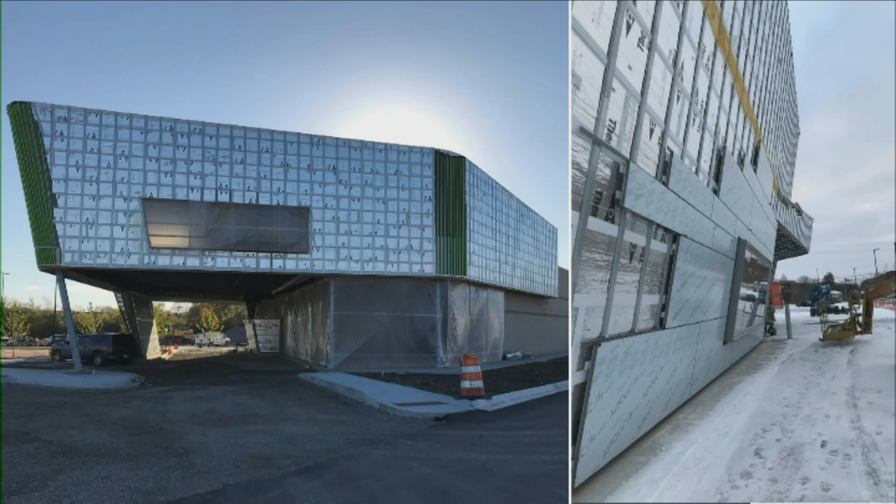It was remarkable to see the development of this. It goes from studs, and off the new model that was created, they're able to make up the differences in what are girders, or girts that come out, and then the insulation fits in between, where the panels clip onto the girts. You can see the kind of tightness that's arranged here.

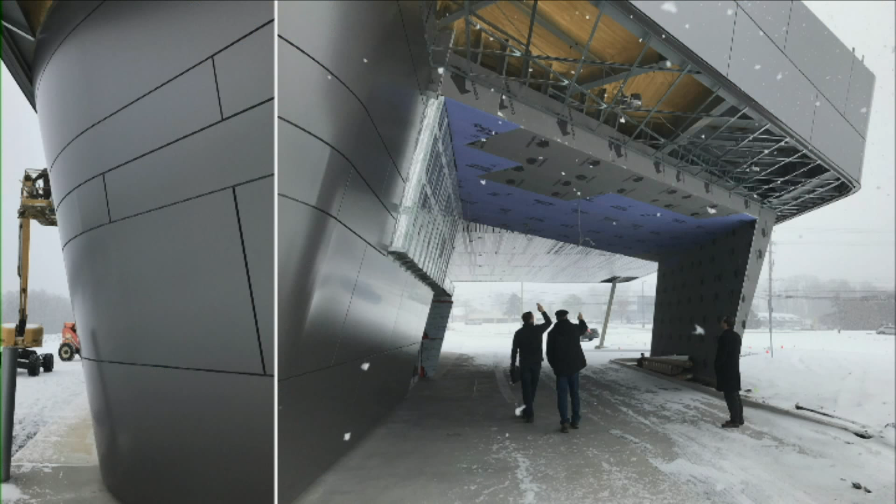What's really fascinating is the compound bends and how they're able to deal with these. I won't say this had no budget, but some of the compound curves and things accomplished here probably wouldn't have been achievable without digital fabrication. You can see where these things bend on the edges, and how tight the tolerances are on these compound curves. Even within it you can see some stress within the panels, but they're all perfectly shaped and formed, straight from the digital file.

So the drawings weren't necessarily created as anything more than referential in terms of the fabrication of those panels. This is even as recent as maybe a couple weeks ago or last week, in the snow.

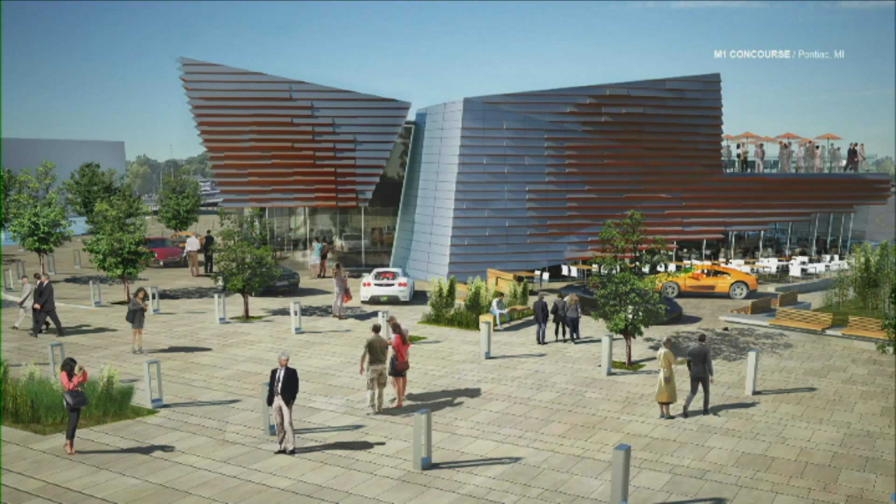The last project we wanted to show isn't necessarily under construction, but I think it really gets at where this can go and what we're excited about. This is for M1 Concourse in Pontiac. The interesting thing about this project—I won't go into the programming too much—but it would be a public space for an area with car condos and a racetrack. This would be restaurant-type use and public space for people to gather, meeting and ballroom type space within it.

They were very interested in the idea of speed and how to capture speed within the facade. So we looked at a metal panel arrangement that would have a lot of movement and texture to it. But even with these dynamic relationships, this is actually a very simply constructed box.

So how did we deal with the idea of panels that were both away from the primary structure, with the limitations that required, and then the individual metal panels themselves? Looking at that, rather than having a multiplicity of different types of panels, the idea was to distill that down to just 5 panel sizes—flat, 3 deviations, and then the corners were of a particular nature.

The corners were kind of tricky because you get this thing that doesn't look so great. So how do we come back and resolve this, writing something within the script so that at the corners it resolves that solution. This is kind of the world that it lives in.

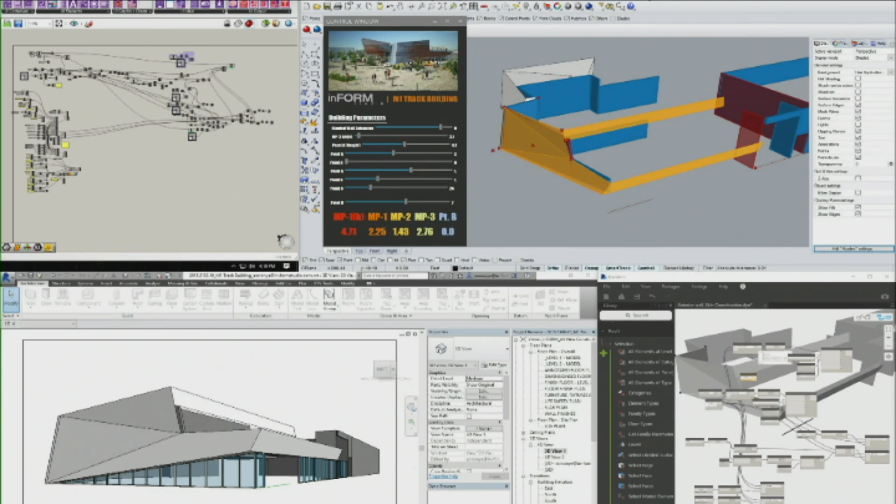So this stuff that you guys are learning now—please get really good at it, because this is the future of where things are going, and what makes the process of making so exciting.

I just want to include this piece real quickly to give you a sense of how the parameters work for an interface that I can understand. Effectively, each one of these points has a particular location, and you can kind of dial up and out. The idea is that each one of these, if you look at the gray that's set back within this, that's the primary structure.

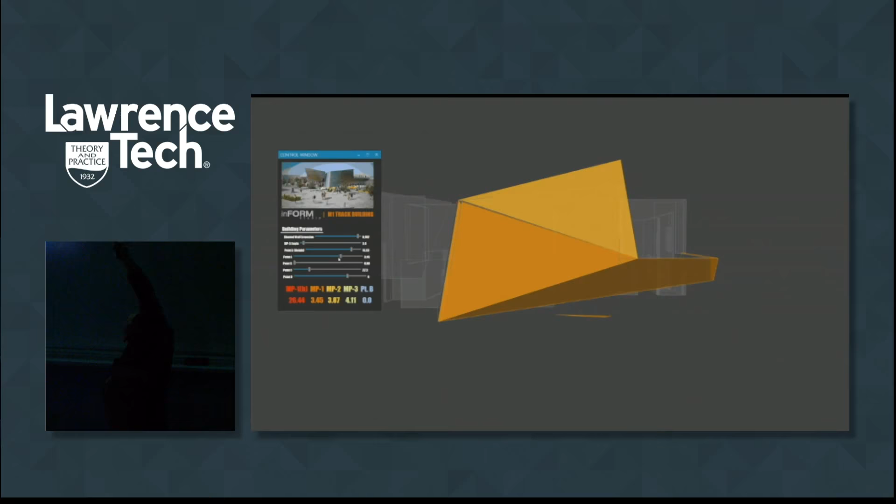The orange can be manipulated within a certain distance away from that primary structure. It can never be more than a certain amount of feet and inches. So the idea is we can work with the overall form, bring it back to what's within the acceptable constraints, and get it even down to the tight nuances and details of where we need it to be.

Then we go to the individual panels. With the individual panels, we can have a certain percentage of each type, and we can move that, manipulate it in such a way to give us the composition we want. At the same time, we can dial up or dial down any one of the types of panels, with cost control associated with all of these things.

Depending on what percentage of one panel type we have versus another, that gives us the ability to figure out, okay, if we do more within the corners, we can do less within other areas, to really effectively deal with cost control and mediate this whole situation. This has been so effective.

What we found is that in talking to some large construction firms, particularly in Chicago, they wanted to dial this in so that we could dynamically look at the cost of an entire building based on the parametrics we put into it. Which is amazing to think about, because how long do we do things where we design, have no idea what the cost implications are, the contractor gets it, comes back, and you end up with this painfully iterative process, rather than dynamically understanding that information as you go. That is where the future of this really is.

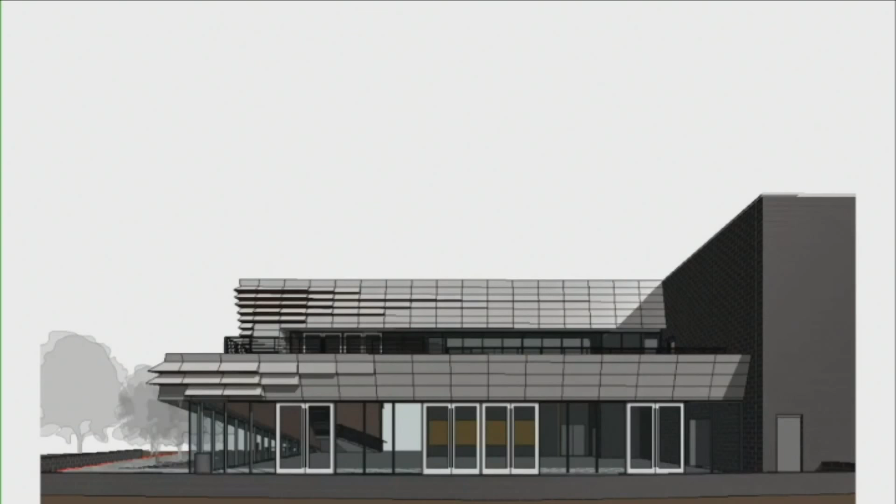So coming back to the piece we started the lecture with, and what was really interesting about this, and why we noticed it, is a project we're working on known as Chroma. What's so appropriate about the timing of this lecture and that email is that this project is very much about the idea of a city of design.

Detroit was given the UNESCO designation of City of Design. It's the only one in the United States and only two within North America. The thought behind that is that Detroit is known as a pioneering landscape for where innovation of making occurs—everything from fabrication of things to assembly line. These technologies have always been here, it's been part of the history, and we see ourselves very integrated within that.

The other aspect is that it's very cross-disciplinary in the way it's thinking—we don't work in a vacuum anymore, we're not the architect genius over here doing this. You need all kinds of disciplines to collaborate together. Even outside of those, if you look at the creative disciplines, what's fascinating is there's music labs, kitchen incubation, not-for-profit making spaces, jewelers, music. You open up the ability of where your influences may come from and how people think about making in a place of innovation.